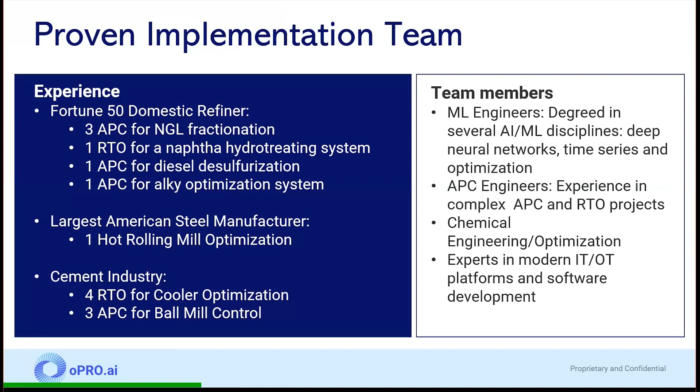Thanks, Rob. Okay, as Rob mentioned, one of the core things we inherited and built on was this deep learning platform. We've configured this for advanced process control and optimization applications. But in the future, this is a flexible platform able to handle all sorts of large data sets.

So in our case, we're using control system data, or PI data and lab data, and we're using it to create and then run online inferentials, dynamic models for control and optimization functions.

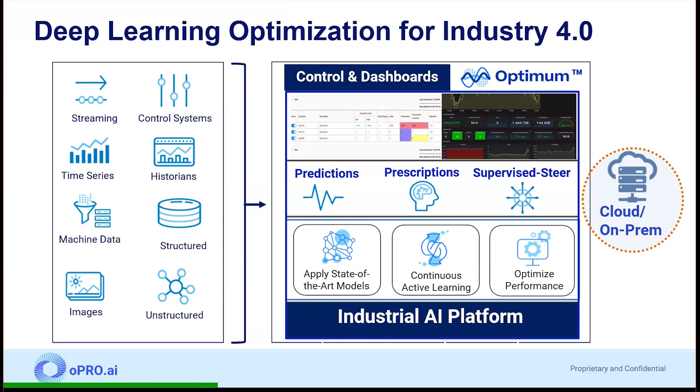With cybersecurity, we've successfully deployed this in the OT environment, in the control system environment, but it's also available for other applications. If it suits your needs, we can deploy this in the cloud, in your cloud, whatever vendor you wish us to. So it's a very flexible platform and efficiently solves these deep learning optimization problems.

All right, so I'll just go through this small use case we've prepared just so I can show you some example models from our platform. So this is a very nonlinear reactor from the literature, and it has a variety of competing objectives: maximize throughput, maximize the selectivity for the wanted product, and then it has typical control constraints.

And for this case, we select two manipulated variables, so two variables that the optimizer can move, and several constraints, several competing objectives, and several disturbances.

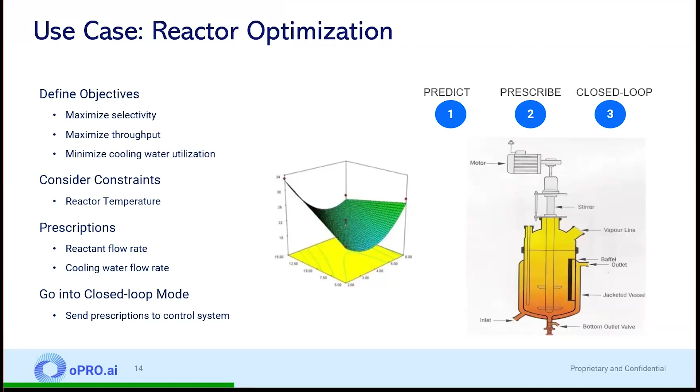Okay, I just wanted to demonstrate, like other industrial processes, this example process exhibits large variations in your first derivative and your gain that we usually use for control and advanced control applications. So here in this application, we're seeing orders of magnitude shift in gain if you go over a large region.

So we can do this type of analysis with your data, and once we do this type of analysis, we can assess what size of a problem is suitable for deep learning optimization, which part of the problem we can do with traditional modeling technology. So in this case, this would be an example of a constraint or objective variable we want to use the deep learning modeling on.

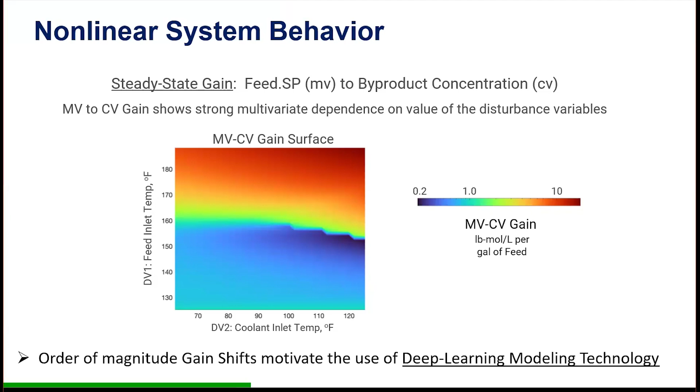All right, so just a little bit about our modeling technology. So we use these autoencoder networks. These are well suited for time series data. So you can choose different nodes in these networks like LSTM or GRU.

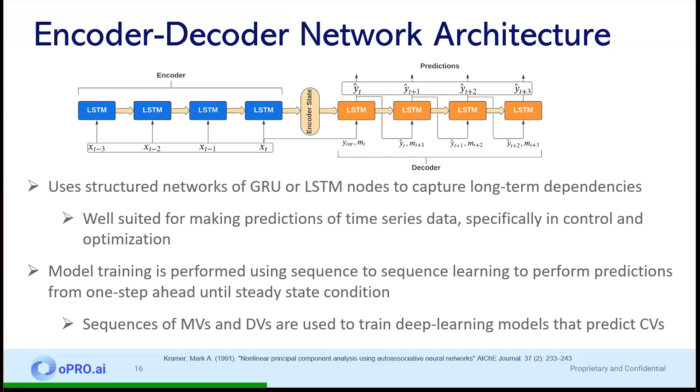So we take your data, we have our own proprietary version of these sequence to sequence models, and we create models of all the inputs to all the outputs, and review them internally, and then review them with your team. Okay, and so here's coming up to the type of results we would review.

All right, so this is an example of different outputs and showing the model fit. So there's two lines on each plot. We're getting a very good model fit from this. This is simulated data.

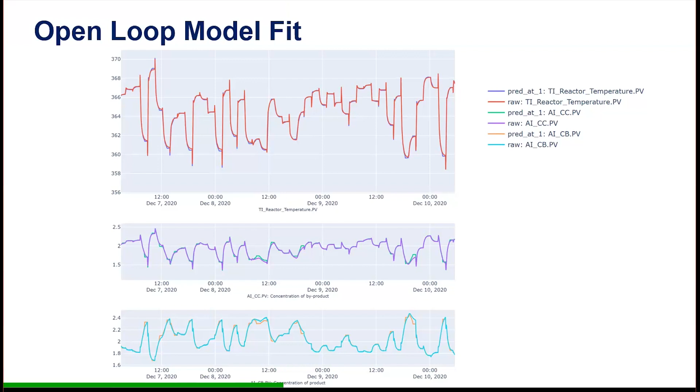It's not amazing that we could overfit to this data. However, in the following slides, I'll show you it's not really overfit. We're getting some consistent dynamic model of these different outputs.

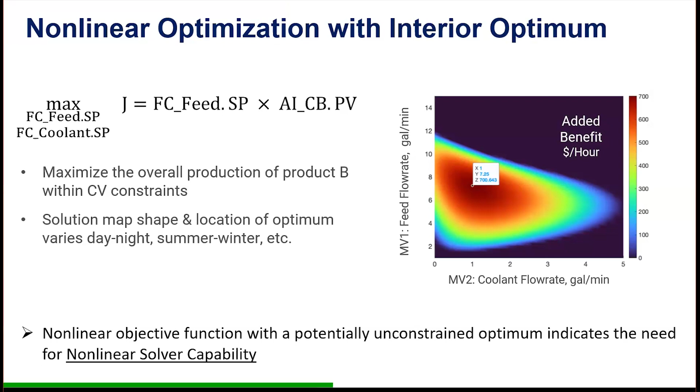So we have a solver that can solve both steady state and dynamic, give a steady state economic optimum, and also provide a dynamic trajectory for control, for reducing constraint limit violations. That's the base of it is a genetic algorithm.

We've also, and that allows us to find, if there's multiple peaks, or even if we're doing that nonlinear search for the peak, that allows us to find the global optimum under any condition. We also have gradient methods to follow up on, and we especially use those during the dynamic control calculation.

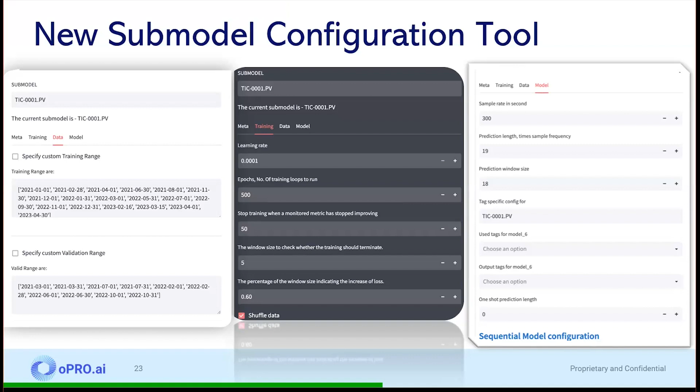So then we're going to have a web browser based tool, so that you can configure your model training, configure the tags, configure the training ranges. You might want feedback from us on some of the deep learning model parameters to use, and then normal model information, sample rate and such. So all this can be configured in the web interface.

And then we're also developing this data selection tool, and it'll show you the different ranges used for training, validation, test, things you marked globally invalid due to the unit being down, things that are invalid for a certain tag or a certain submodel. So all that is also available in that web interface.

So our aim is to get these tools into our customers' hands, and if they want us to do the modeling, we add the resources. If they would like to, or find a third party to, we have the platform available for them. We're meant to be a software vendor someday, but in the meantime, we'll guide you through this process, or for companies that don't want to take on the responsibility of model training and maintenance, we can do that for you.

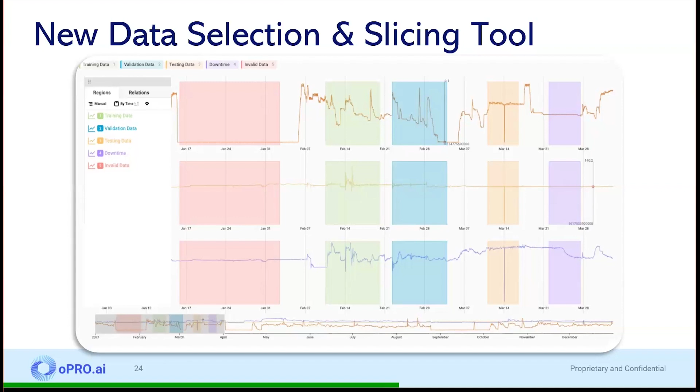Yes, Tim, thank you so much for introducing the methodology and our technology. I would like to start by giving some of the customer feedback that we have been receiving. By doing these projects and implementing these applications, the deep learning technology, of course, is trained with more data. We are looking at larger regimes of data. So we can expect, as we have seen and they have confirmed, that the application can run efficiently under different regimes. Sometimes if you have an application that is linear and you are below a certain capacity, probably it's not going to perform as well because the delays have changed, some behaviors have changed. So you will expect that.

Also, there is no linearization of the objective function, so the objective function can be of any number of terms. This is particularly important when you are doing real-time optimization or plant optimization, since your optimization function can vary, and you can pass variables and parameters, and then update the parameters as needed—for example, cost values, price values, etc. You can also change the objective function on the fly, meaning that, let's say, a certain variable is not important for this time, or for a certain season. Let's say you don't care about vapor pressure in the winter, you can zero that out, and then the optimization will just consider the other variables.

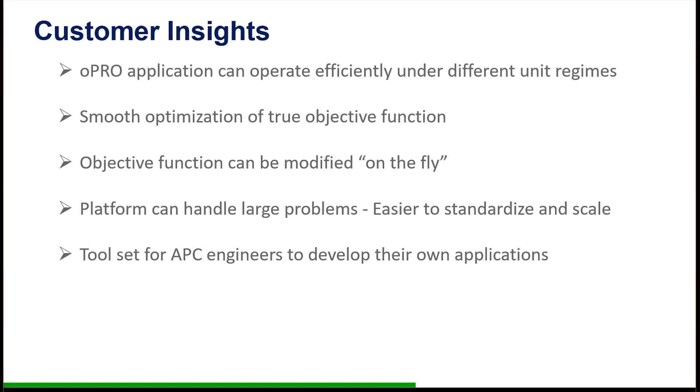You can create models and submodels and assemble those in a way that you can predict the whole thing and then optimize for the whole data set. Our customers also say it's strategic for us to have a platform, not only because we can do MLOps and control and monitor multiple things, but because customers sometimes have their own resources to build applications, and we provide a platform they can use.

After completing successful projects in other industries like ball mills, calciners, and clinker coolers, we moved into oil and gas, and the first use case was a fractionation system. Here we see one of the distillation columns, where you want to maximize the feed rate to process more feed and get more revenue.

You want to look at the constraints: the products and bottoms, pressures inside the system, accumulator levels, and all of those things. And you want to prescribe optimally to get more product, operating at the optimal reflux flow rates and minimizing any heating that is used.

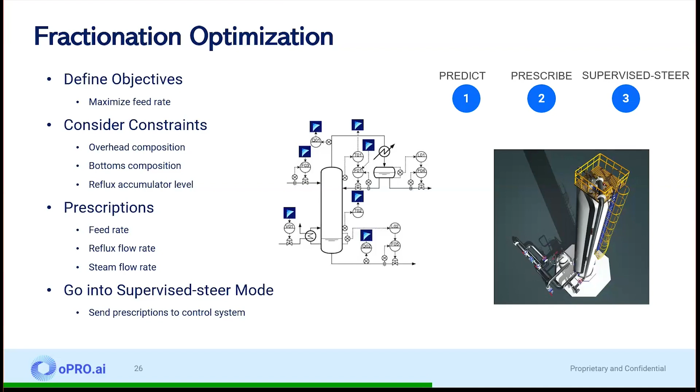That specific fractionation system is composed of 4 columns: the deethanizer, the depropanizer, the debutanizer, and the deisobutanizer. So as you can imagine, this is really a large problem that we want to control and optimize.

Here we're looking at the typical spread between the product values, which is around $1.38 per Mscf. We compare the initial capacity that the current MPC had at the plant to a 4% increase, and we can see a margin increase.

This is not just revenue, this is real margin given to the customer by the application, just from maximizing the feed rate to the units. Other value exists too, since you can reduce product giveaway and reduce energy intensity, but those weren't added to the analysis - they would only add to the value. So that's the APC type of application.

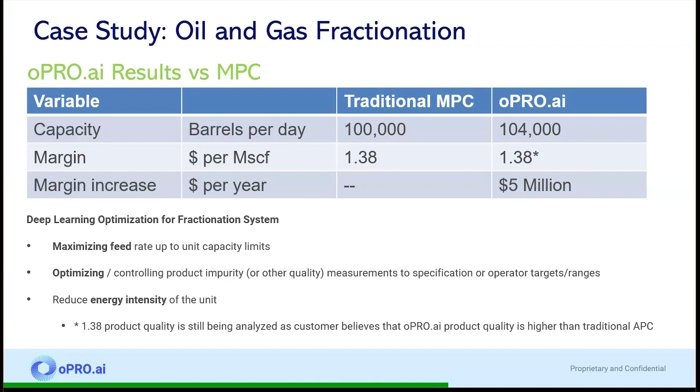In the next slide, let's look at another use case: plant optimization, which other people call RTO. This is about coordinating existing units that already have some APC, which could be from different vendors.

This RTO is looking at the overall optimization - what is the best way to produce a certain amount of product? Some units are more efficient than others, probably due to their configuration.

For a human, it's very difficult to keep in mind the economics and also control in a stable form. So this type of application sits on top of the APCs. Of course, we look at the overall economic function and the main pace setters for every unit.

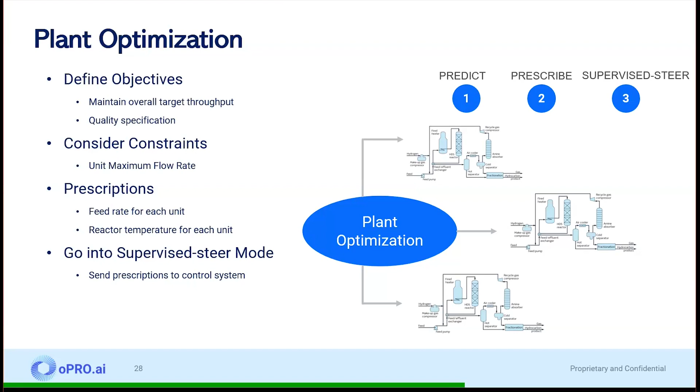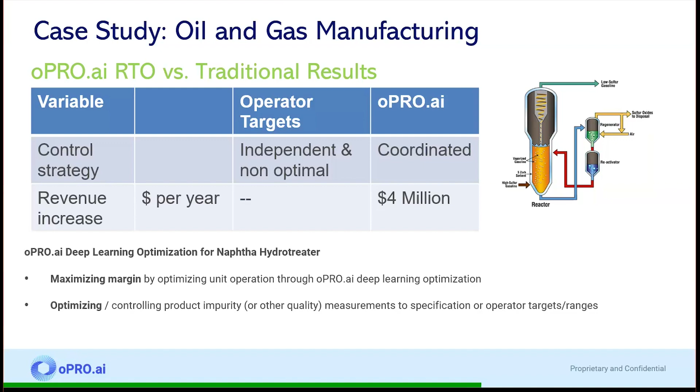If we look at the next slide, we can see how these naphtha hydrotreaters are being optimized all together. Here we're comparing an independent, non-optimal strategy of control, which of course works, to a coordinated fashion where we make fine adjustments to the manipulated variables, getting an increase in revenue, maximizing margin, and optimizing the products as well.

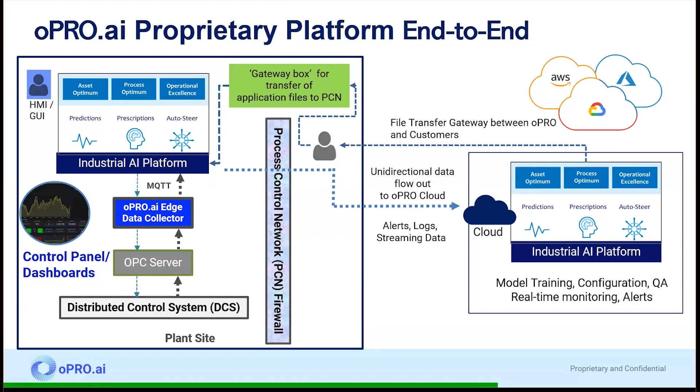We train the model on the web, and then we can read data so we can monitor the model. But we can run both completely on-prem, or we can be hybrid.

Something very important is that we also have MLOps, which is good for model development - to be fast. Think of it like software development, where you want to know what version you're on and track the model. If you have a good model, you want to be able to reproduce it, or roll back if a particular model was behaving better before.

So we can support retraining of specific submodels, and then we can always look at the performance of these models in real time.

Right? So that's something very important. It's not just about the algorithm. It's being able to reproduce the performance and the behavior, right? So you don't want surprises in operations.

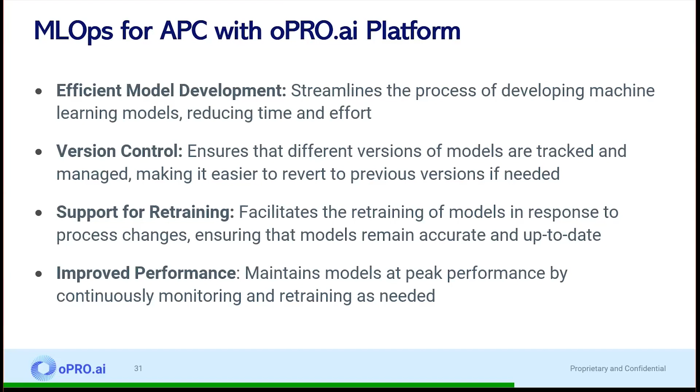And of course, we need model updates. And the reason that we need model updates is because there is a process fouling in heat exchangers, and there is aberration and new conditions for which the model was not trained. So there is decay in catalyst. As you can expect, probably the yield goes down because your catalyst is being poisoned or is being degraded.

Also, your analyzer accuracy can change. So all of those things are basically things that need to be considered, and we should be able to give the customer an updated model fast, so that they can prepare and update their system.

So, as Tim mentioned before, there is no perfect model. The model, of course, at the beginning is going to perform very well, but let's say that we talk about this degradation, things that happen. We can always adjust the gain that we see, right? So we also have a bias filter, and then we have different ways of overriding the behavior of a particular

model. So we can have a linear model specifically for a certain variable for which we want to wait for more data. So, let's say, 95% of the model is deep learning and 5% just has linear dynamics. It's possible to do this mix and match.

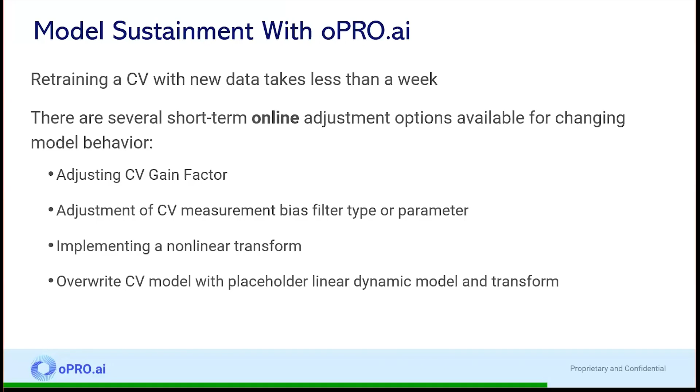And that's it. This takes us to the end of our presentation, and we will be glad to